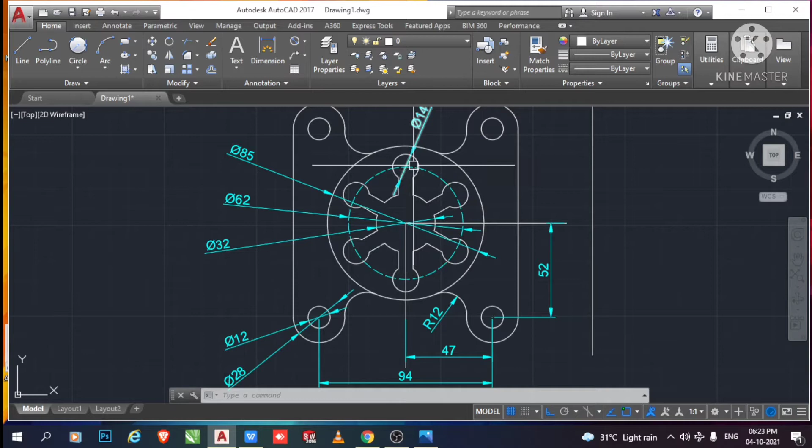Here we first create this center line, and now we create three circles. First circle will be 85, second circle will be 62 dia, and the third circle will be 32. Here we create a circle of 14 diameter, and now we make the pattern of 6 numbers. So here we create this 2D sketch.

So look how we create this one. Here we first go to this circle and now select the center diameter.

Now okay, and here we create the circle. Select this point and drag, and here we make the circle of dia 85. Enter. Now again select this one, and from this center point create second circle, will be 62.

Now we create the third circle, so this third circle will be 32. Select this center diameter, and now select this point and make it 32 diameter.

Now here we create a center line. Select this line and make sure ortho mode is on. Now we create this line from this point to this point.

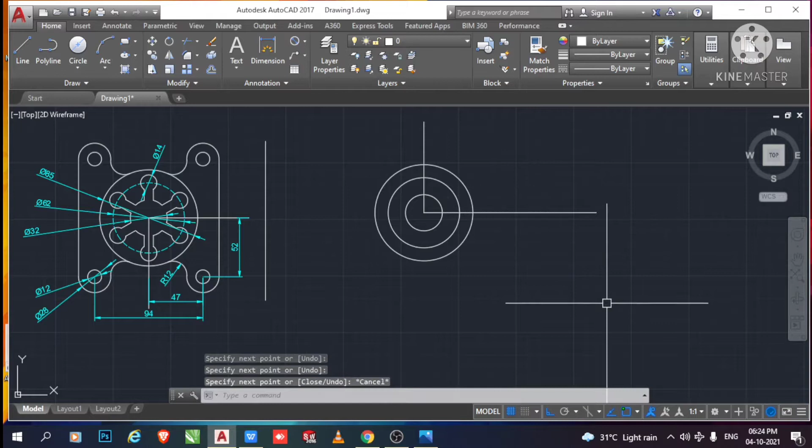Here we create a circle to this point. Go to this center diameter circle, and now select this quadrant, and here we make this diameter 14. So make it 14.

Okay, now here, sorry, we are going to forget this dimension. Let's check this gap. Select linear, select this point to this one. So this gap will be 8 mm.

So here we make the offset. Go to the offset command, and here we make the offset of 4 mm. Enter. Now select this line and drag here. Now again select this line and drag this side.

Okay, here we delete this unwanted sketch. Go to the trim, it's better to press TR on your keyboard for trim. Now again select, enter. Okay, and here we delete this one. So select this one also, here delete.

This one now, here delete this one, and we select this circle and convert it for construction purpose. Okay, now here we create this circle, and we select this both line and remove it.

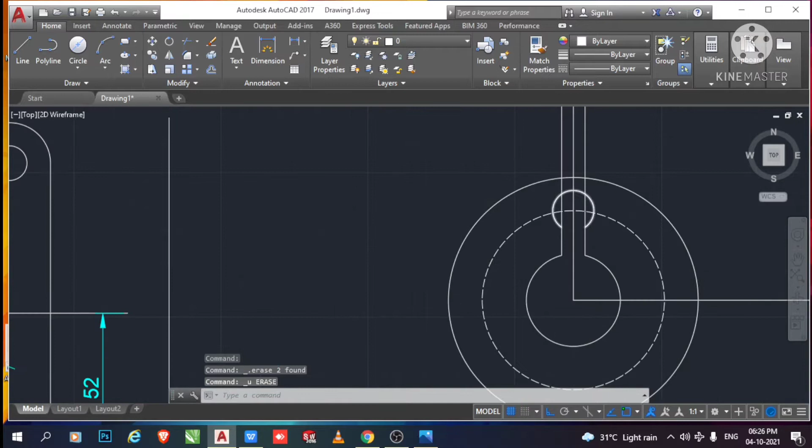Sorry, here we delete this one. So we make trim, select this trim feature, and now select this, here trim also, and again select this one and make it delete.

So here we create this shape, and now we make the 6 number pattern to this one. Go to array command, press ARR for array, and now we select this circle and this line and this line, and here we make enter key.

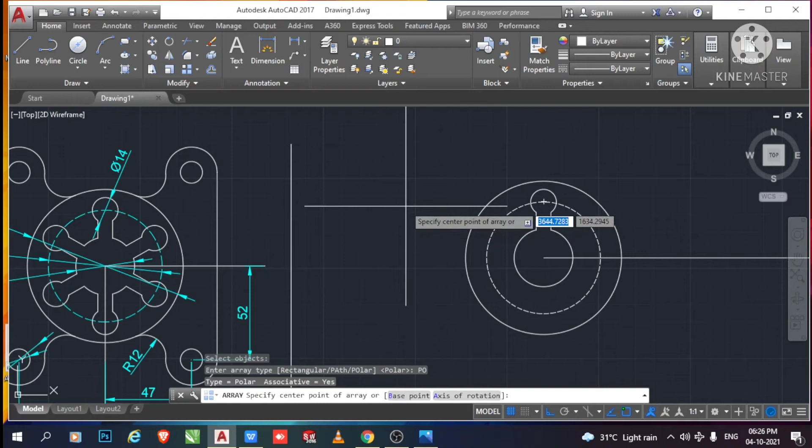Now it will ask array type, so we select polar, and it will ask the point where we want to array. So we select this center point. Okay, and here it will create 6 number of pattern.

So here we delete this line, so we use trim feature. Press TR for trim, then again enter. Now we delete this one, so select delete.

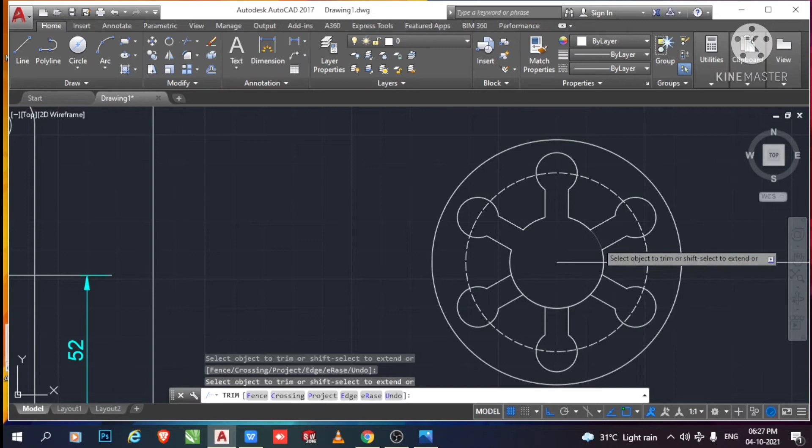Okay, here we create this sketch, and now here we create this circle profile. So from this center point the distance will be 52, and from this center point this distance will be 47.

So here it's better to make offset, so it becomes very easy and drawing takes less time. Select this one and we create this line. Okay, now select this one and from this center point we create this vertical line.

Okay, and here we create the offset, so select this offset, and from this line we create the offset of 52, so distance will be 52. Enter. Now select this line and drag below side, and here we create the offset of 47 to this vertical line.

So again go to the offset and make the offset of 47. Enter. Now select this line and drag here, so here we create this one, and now we use trim command, go to press trim, enter, again enter.

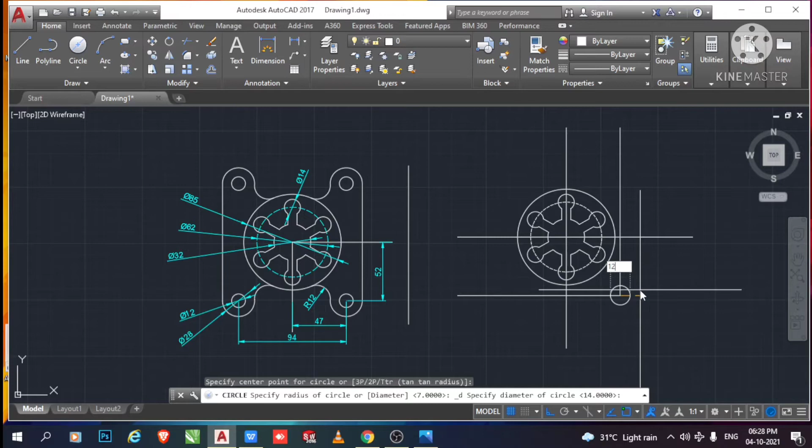Now delete this line also, this one, and here we create two circle profiles. First circle diameter will be 12 and the second will be 28. Go to the center point circle, select and make it 12. And this circle will be 28.

Again go to the center diameter circle, and from this point select this point and create, and this length will be 28 dia, so make it 28. And here it's better to make a mirror feature, so here we apply mirror feature.

So go to the mirror. Now select this circle profile, then enter, and we mirror from this end point to this end point, and it will ask erase source object, so here we press no.

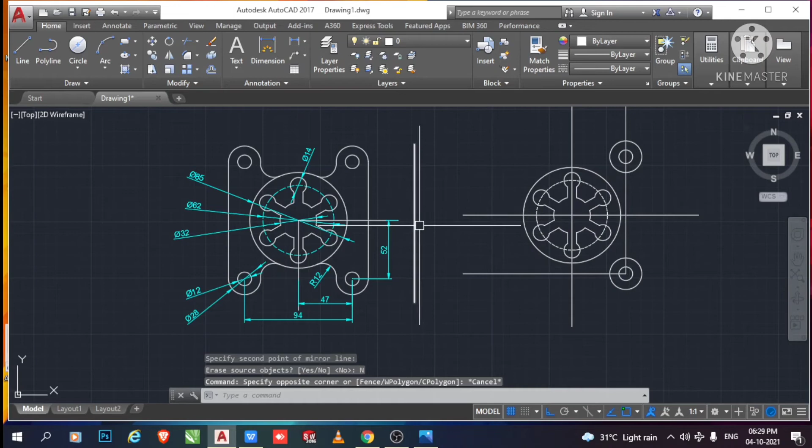And again we make the mirror, so select mirror command. Now select this both circle, this one also, and make it enter, and we make the mirror from this end point to this end point, and it will ask erase source, so make it no.

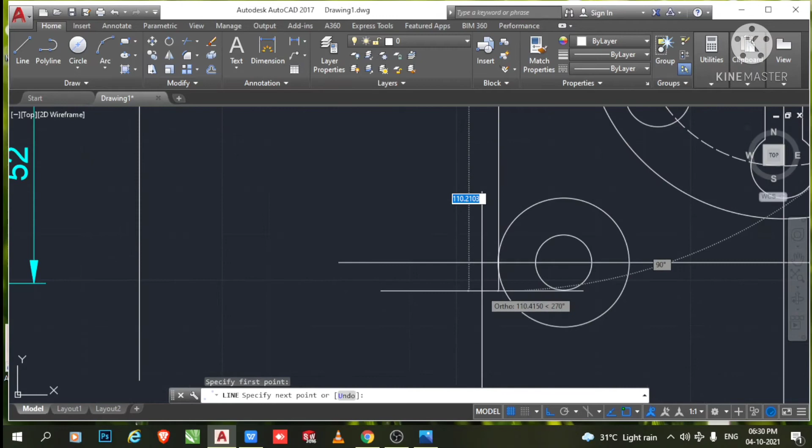And here we create a vertical line to this circle, so go to the line. Now select this point and make the line up to here. Now again select this line and select this quadrant point and make the line up to here, and here we make the tangent circle of 12 radius, so it will create by using tan radius.

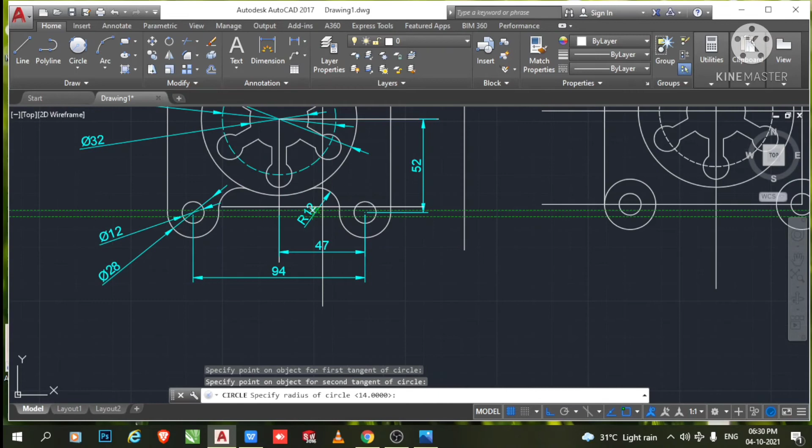So go to the circle. Now here select tan radius, and now here we select any circle distance, select this one and select this one, and it will ask radius, so radius will be 12, so make it 12. So here it will ask, so make it 12.

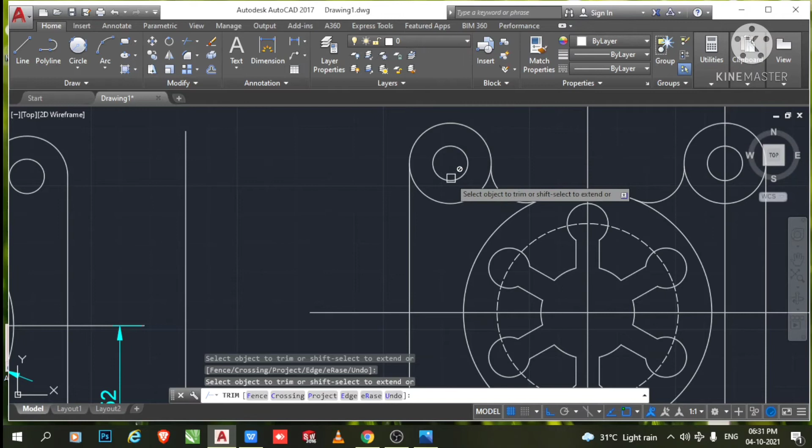Enter. Now again select this one and select this tangent face and this face and make it also 12, and here we delete this unwanted portion, so we use trim, press trim command, enter, again enter. Okay, and here we delete this one, so remove and delete this also.

And here it's better to make the mirror to this arc feature, so we select this mirror. Now select this arc, enter, and select this point to this end point, and make the erase source object no.

Here we delete this one, so we use trim feature, so select TR for trim, enter. Now select this one and this one, so it will remove. Here look,

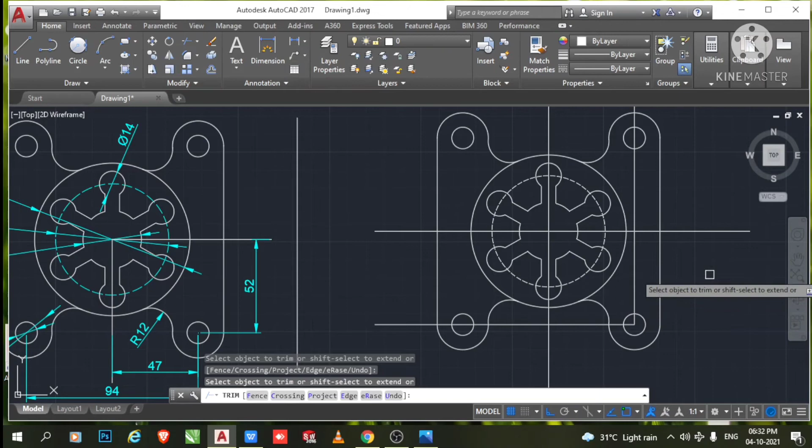Now look how we create this 2D sketch. So select this one, this line, and this one, remove it, delete. Now here we apply this line, select this one to this one.

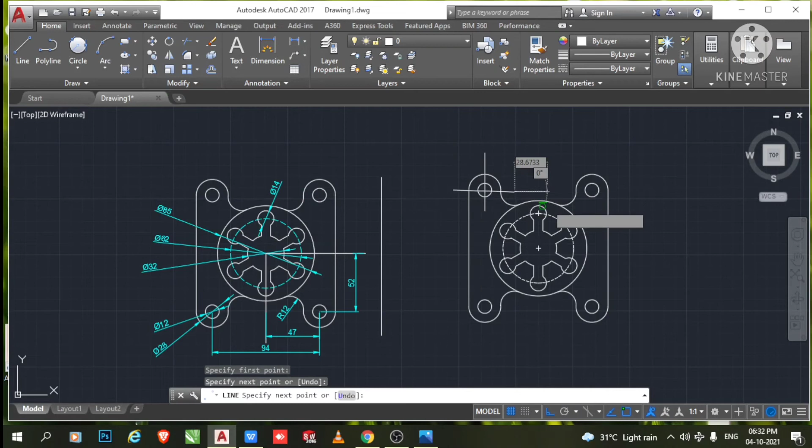This one, again select this line. Okay, here we apply the dimension.

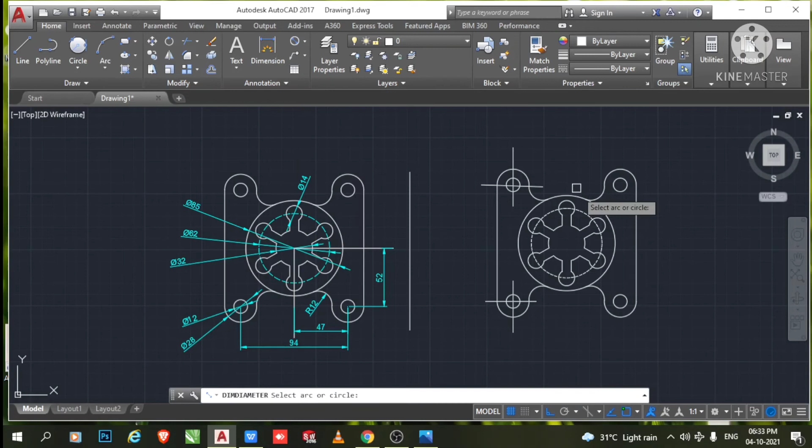So go to the dim style linear. So it will show various options. So we select this diameter, select this one and make it 85.

Again, if you want to apply a repeated command, it's better to use the enter key. So select enter key. Now select this one and it will be 62. Again select this one, it will be 32 dia. Again press enter key and this circle will be 14.

Here we select this center, select this one and it will be 12. Again press enter key. Now select this one and it will be 28.

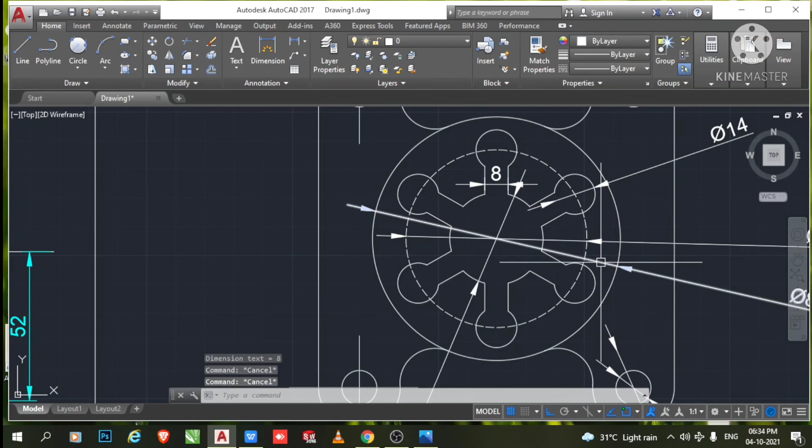And here we better apply this dimension here. So gap. So here we go and select this linear. Now select this point, end point to this end point, and this gap will be 8 and number of pattern will be 6. And here we make this radius

circular. So select this one, select radius and it will be made 12. This fillet will be 12 mm. So look how we create this 2D sketch.

And here we forgot to add a dimension here. So again select this one and select this linear, and from this center point and this point, this distance will be 52.

Again select this linear pattern, linear dimension, select this center point and this point, and this gap will be 47. And again select this one, and overall this will be 94 distance.

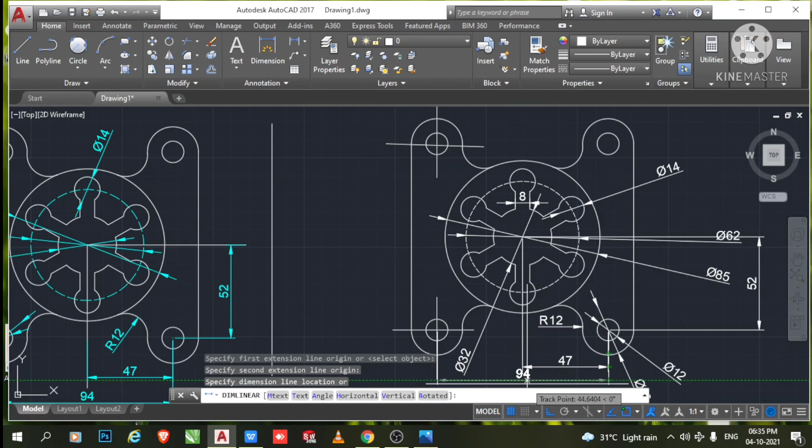Okay, so look how we create this 2D sketch in AutoCAD. I hope you like it. Thanks for watching.